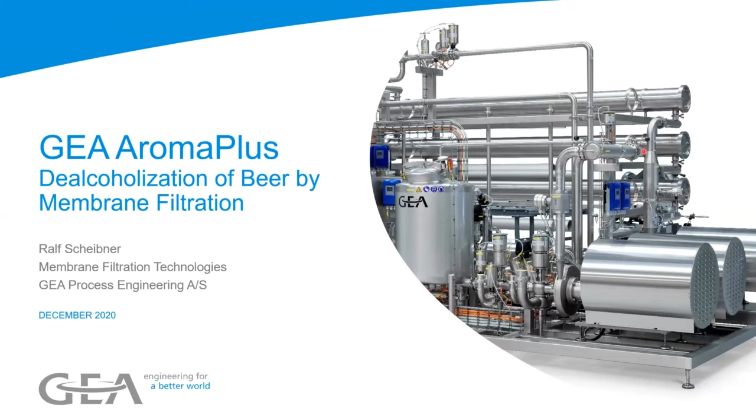So what are the drivers? The health consciousness of consumers are the drivers, low sugar drinks, all this kind of stuff. In this category we have the low or the alcohol-free or low alcohol beers, which is less than 0.5% ABV, and then what's supposed to be called non-alcoholic beers that goes down to 0.05, so 10 times even lower. So as I said, it's consistently outperforming the growth or decline of normal beer sales, and it's getting interest in other markets.

Just recently we got an inquiry to build a de-alcoholization unit for cider processes. So let's go through that.

The principle that we are applying is actually reverse osmosis. The beer and the filtrate, so the permeate, are separated by the GEA AromaPlus reverse osmosis membrane. This membrane was semi-permeable and selective for alcohol. During the invention of that unit, we went through different membrane suppliers, and we screened them all and found the best membrane for this process.

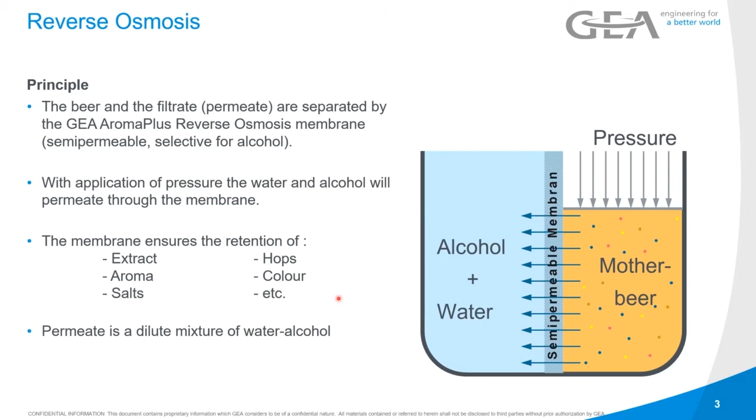So let's see how the process works. First of all, it involves batch tanks, which are not included in the unit. It could be tanks that are already existing in the brewery, or you have to buy batch tanks. The permeate tank is not mandatory, it can also go to drain, but if you want to get the value out of the permeate in that water-alcohol mixture, which can be used for CIP waters and dilution waters, because it's actually beer water coming out of the beer, you need a tank as well.

So first operation is fill the batch tank. Second operation, we start the process, so we recirculate that beer over the batch tank and the membranes. You see that little nozzle in the tank, that's a jet mixer that we would apply into the tank so that we always have a homogeneous mixture when we are applying it to the unit.

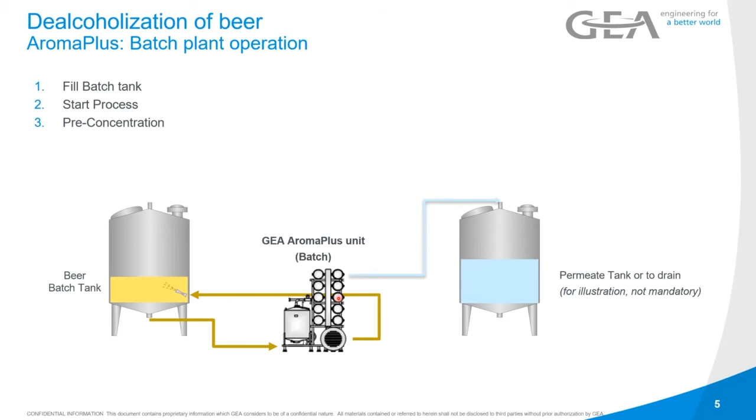Then we do the pre-concentration, so we concentrate the beer side, removing water, so the extract concentration in that batch tank gets bigger, so the volume gets less.

Then we do the diafiltration step. At this point you're not getting into the permeate tank anymore the same ABV as your mother beer had, because we need the deaerated water for diafiltration to wash out the alcohol from the mother beer, to get down to 0.5 or even 0.05% ABV. That's just not possible in a different way.

After that, we do the dilution and blending for the end product. That always depends on your recipe. Some people, when you see non-alcoholic wheat beer, you notice it's most of the time a little bit stronger in color. That's just because they are not diluting back to the same degree of Plato in the end, so they're not applying the same amount of water to the product that was removed. They're applying a little bit less, to even increase the taste more.

But you have to remember this process is a non-thermal process, so all the flavors and everything stays inside the mother beer, inside your non-alcoholic beer. If you look at thermal processes, especially falling film evaporators in the older times, now distillation columns, the problem is that you would always remove flavor, because some of the flavor components are just soluble in alcohol. If you distill the alcohol out, the flavor component will go with it.

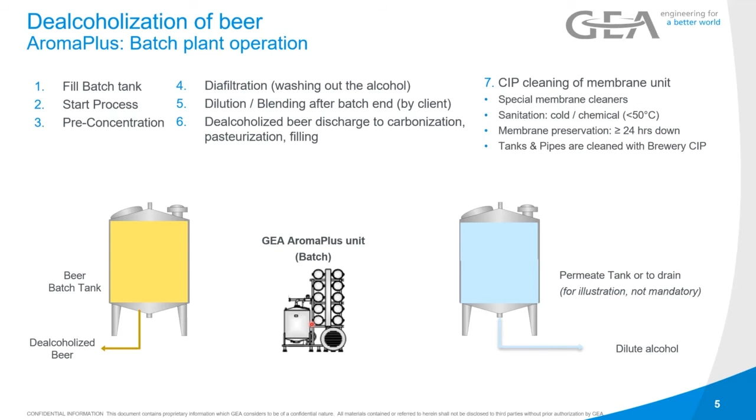So an overview of how to integrate the unit into a brewery: as we said, we would need a batch tank, and there are some other things that are needed. We need deoxygenized water, so deaerated water. You see that CIP dosing unit that belongs to that product that you can buy, and then after the process, the dealcoholized beer needs to be diluted, needs to be carbonized, and then you heard something about the EcoFlash this morning.

Most of the times, because there's no alcohol in the product, there will be a pasteurization step to make it more safe. We can also deliver filling lines from our newly acquired company, GEA Vipoll, which is available in the craft market with very special solutions for craft brewers as well.

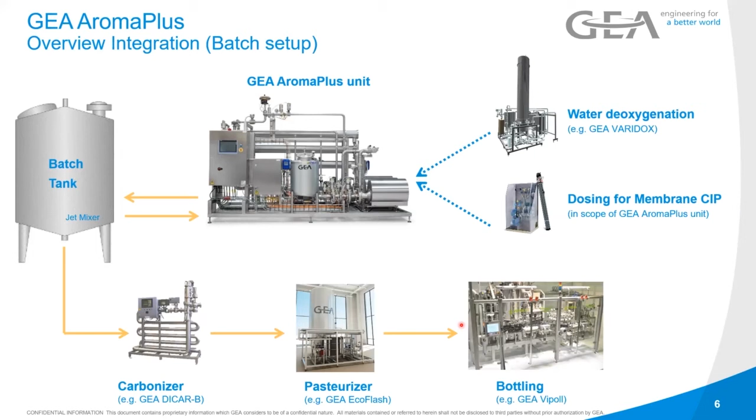But most of the time we see that it's more practical for most brewers, because beer brewing is a batch process, to use a batch unit as well. Just keep in mind that there is always the possibility to go to continuous operation with this membrane unit as well.

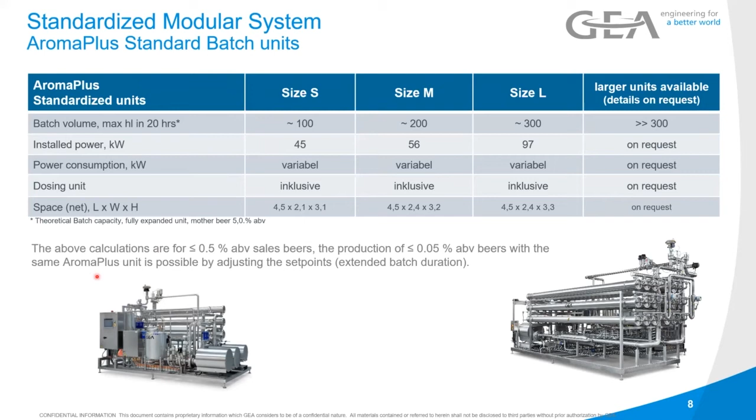You see the space you need roughly, and all the above calculations are for 0.5 ABV sales beer. For the production of 0.05 ABV beers with the same AromaPlus unit, that's obviously always possible, but we have to adjust the set points for the diafiltration and the different processes.

So some requirements so that you can know what you would need if you are interested in buying such a de-alcoholization unit. Obviously electrical power. We need compressed air to operate the valves at 6 bar. Steam or hot water is only necessary for CIP heating of the unit. We need chilled water or glycol cooling to cool the process, because we are putting in pressure and energy, and this energy needs to be removed. We need deaerated water for diafiltration, process water for CIP cleaning after the run, and CO2 for the CO2 push out after cleaning or before production, so that we make sure there's no oxygen inside the unit - we push everything out by CO2.

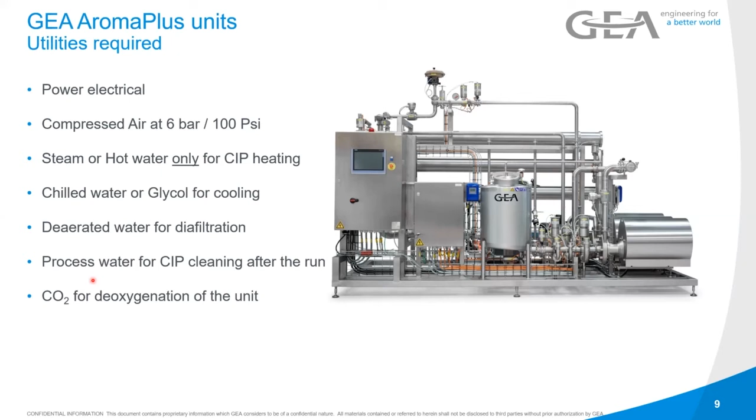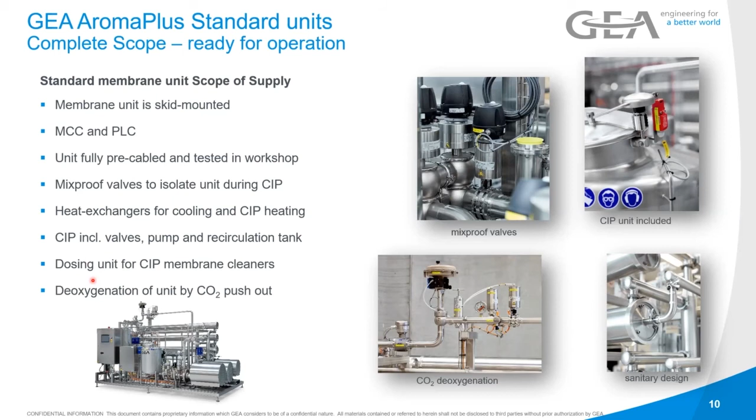The deoxygenation of the unit is also programmed via CO2 push out, as I just mentioned before. So we've got the sequence-controlled membrane unit production sequences and CIP sequences - 8 different CIP sequences that are programmed. There's a VPN router on board, so that you can directly get remote access and support if you want. It's all programmed on a 15-inch touch panel for the local HMI. Connections to the SCADA system are normally via Ethernet and can be available via Profinet if necessary. The MCCs with the variable speed drives for the pumps of the unit are built onto the skid.

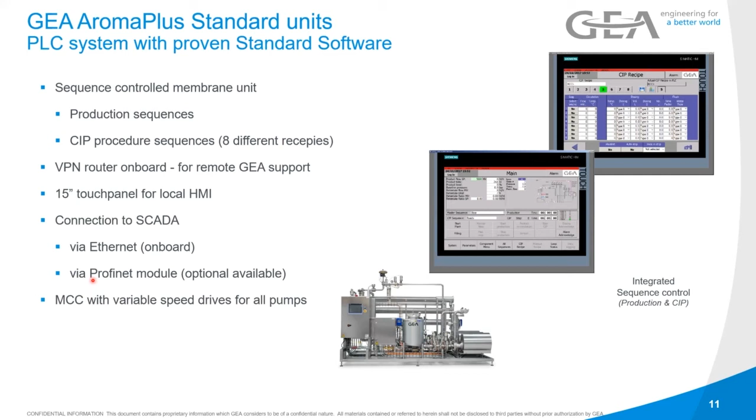Here we have a closer look at the detergent dosing system for the CIP, which we developed with one of our suppliers. What is new is you can dose up to 6 different detergents by just using one pump. Very often we see these dosing units where every detergent has its own pump, but we designed it this way so that it can run with just one pump instead of 6. It's a complete and compact design - as you see, it's in a housing, so it's splash proof, so there's no work safety issues. Connection is only power, air and water, and then it's ready for operation.

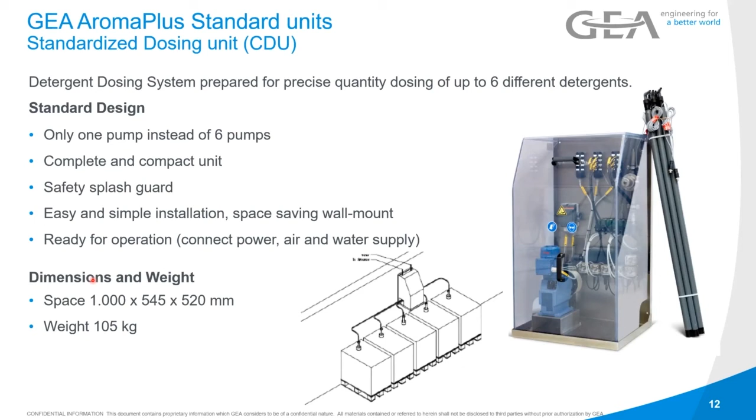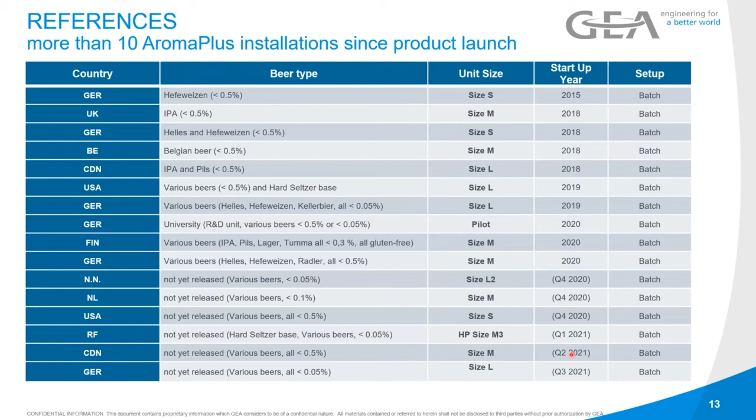Some references we have - so you see different beer styles: wheat beer, IPAs, Helles and wheat beer, Belgian beers, IPA and pils, various beers and hard seltzer base - I will come to that topic later on. Here we can't say anything about it at the moment, what kind of beer it is, but we are going down to 0.05 or 0.1 actually with the newest installation that we've done, also with the last one we've done in Germany this year. That's going to be installed in Q3 2021. That's how it is.

Let's have a look at the membranes again - on the right hand side you can see the membranes that are inside these pressure modules. We can get high quality beer with a typical aroma profile that is nearly the same as the beer with alcohol, so by blind testing trials it was very hard for people to find out which one was which. We can go for 0.5 and 0.05 ABV sales beer, non-filtered and filtered beers. We get the special membrane in sanitary execution, so it's FDA approved.

We get water savings in because we do the deoxygenation and CIP by CO2 blowout. It's a sanitary plant execution with mix-proof valves, modular design, as I explained at the beginning - you've seen that unit that had only 3 pressure housings that was upgradable to 6 pressure housings without changing anything on the pumps and on the unit. It's a compact and fully pre-assembled unit, with integrated PLC control and integrated CIP. So that's the normal unit.

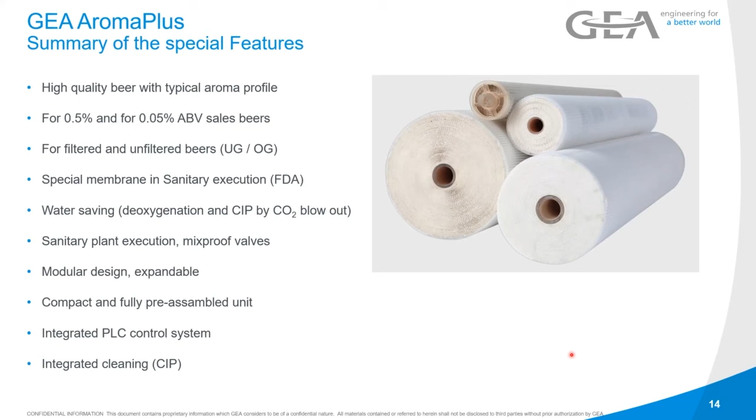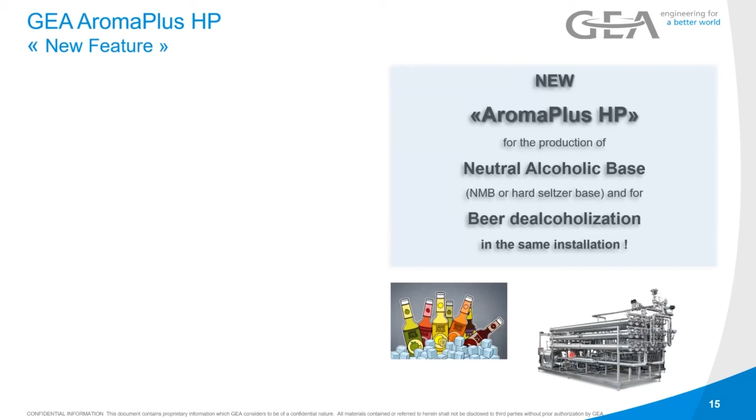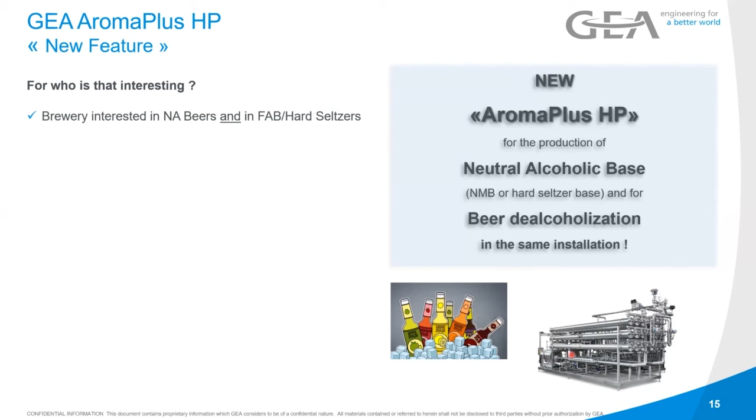And now we come to a brand new invention that we've just released - it's the new AromaPlus HP, which is for production of neutral alcoholic base or hard seltzer base. It also does the same that I just explained to you, and it can also de-alcoholize beer in the same installation. So that is obviously interesting for breweries that go beyond only normal beers, that want to expand into that very, very quickly growing hard seltzer market, which is not only growing incredibly in America, but is also coming over in waves now to Europe. The AromaPlus HP is the same unit and the same concept as the AromaPlus - it's the same membranes, so you can still do your 0.05 ABV beer.

It's a special execution to also process fermentation broths from NMB fermentations. As I mentioned during the flash pasteurizing presentation, the process for producing NMB or hard seltzer is completely different because it contains less grains and stuff. It's just water and sugars and this kind of thing, so it's a little bit different to process.

So we are featuring here the dual use capability. If you would buy a unit like this, you can still do your production of different non-alcoholic beers, and you can also produce a neutral alcoholic base to produce hard seltzers.

Just a quick note on hard seltzers - that's going to be covered by Isabel in her presentation after this, going into depth on what hard seltzer and the hard seltzer process means. As I mentioned, the water and the alcohol are valuable products. For hard seltzer, the neutral alcoholic base works differently - for de-alcoholization your product stays on the non-filtered side of the membrane, but for the hard seltzer part, the permeate, what goes through the membrane, is the product, and the neutral alcoholic base is what you then process and add flavors to.

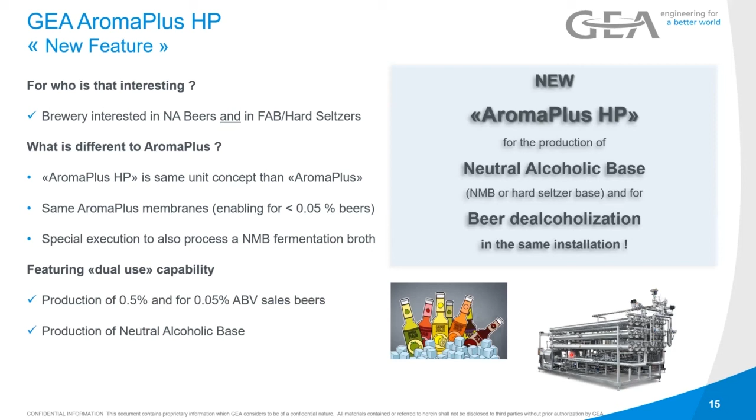So that was the end of the presentation for the AromaPlus, a membrane de-alcoholization unit that is very unique to the market and one of our unique selling points within GEA.